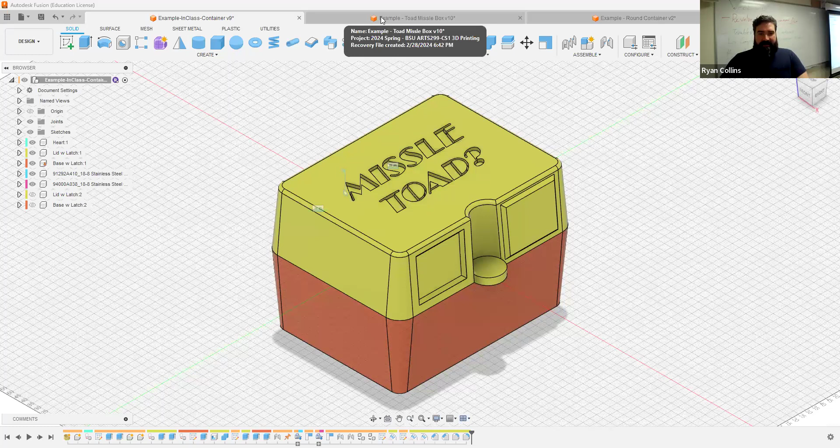So what I've done on one of the other models, the one that actually contains the missile toad, is added latches. Now these are just randomly assembled. There's no specific design feature to these, but this container now opens as well.

The latches also rotate open and close. What I've done with this is I added little tabs in the front and more hardware, but these are attached exactly the same way that the lid is attached to the base.

And these components are not nested within anything. Like these two lid components, you'll see the two latches here. They're all at the same hierarchy, at the same level as all the other components on this project. You can nest them within, say, the lid, but it's unnecessary.

So how I've done this is the same way I modeled the tab lobes for the main hinge here. I'll open up the other sketches—I just added more.

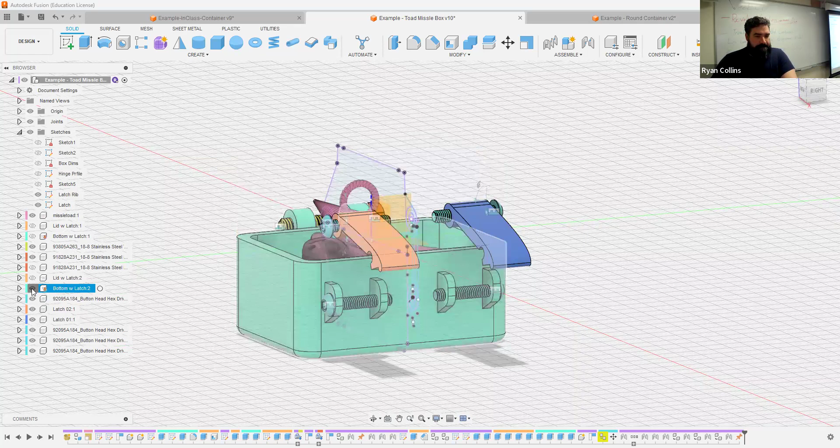Let me hide the lid and base. Oops, that was those two latches. And missile toad—same thing. I used the project tool to borrow the profile of the sketch of the container.

I just made these two simple sketches that are based around two circles rather than just one on the center here, and just drew lines between them essentially. It's kind of an oversimplification, but at the same time, it is fairly simple.

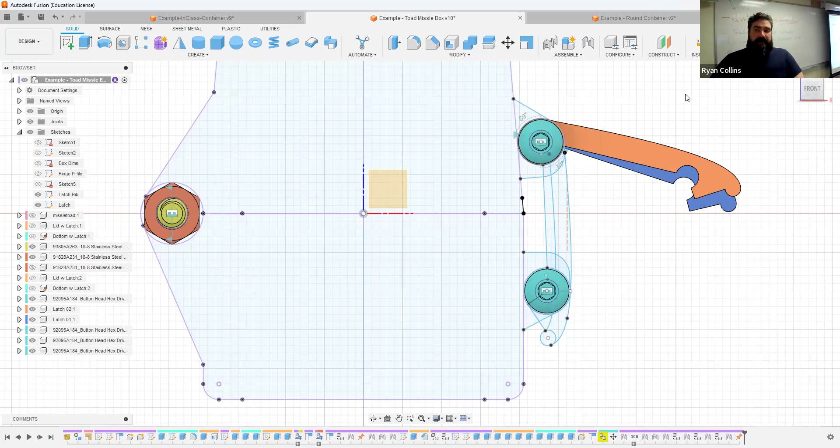You can choose however many you would like to make—this design has two latches, kind of overkill for something so small. This could also easily take the place of your little thumb catch here and such. So it's your choice, just an additional option.

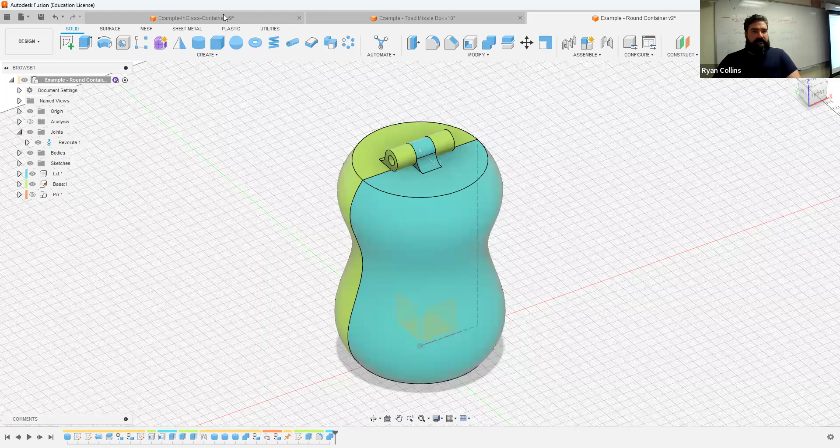So let me go over to our current example project. I meant to close that. The now questionable missile toad, as it does not in fact have a missile toad inside.

I would recommend, if you're going to decide to add a single latch, omit the tab here—it'll take its place. Or obviously the little plate features here, don't add those because that's where it's going to go. So let me make some duplicates.

The trick is, if I copy and paste these full components as such, it will copy everything about them and link the two. So what you should do, rather than copy and paste the components itself, is add new components and copy and paste the object itself. I'll show you what I mean.

I've already created these two additional components here, and I did exactly that. I have the lid, and you'll see the problem is it's an exact copy.

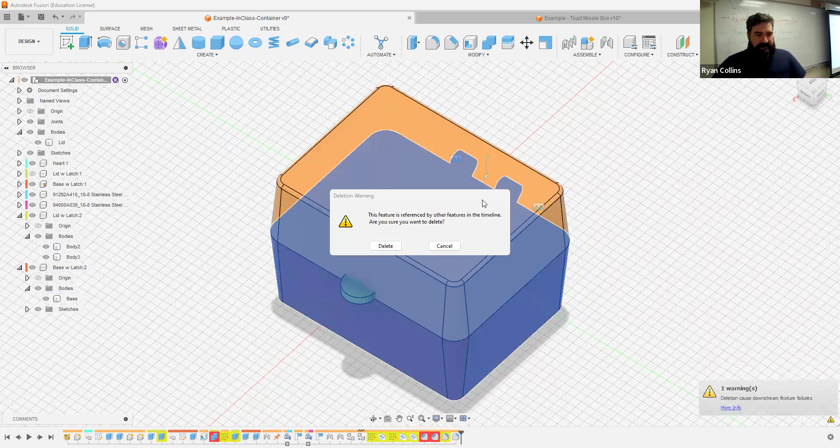So I'm going to delete these. Yes, deleteify. As well as the other here. Yes, deleteify. All right.

Oh no, it deleted everything. Well, that's certainly a problem. So let's Control Z that.

Great, that's all back now. Cool, so do not delete—that's certainly a problem there.

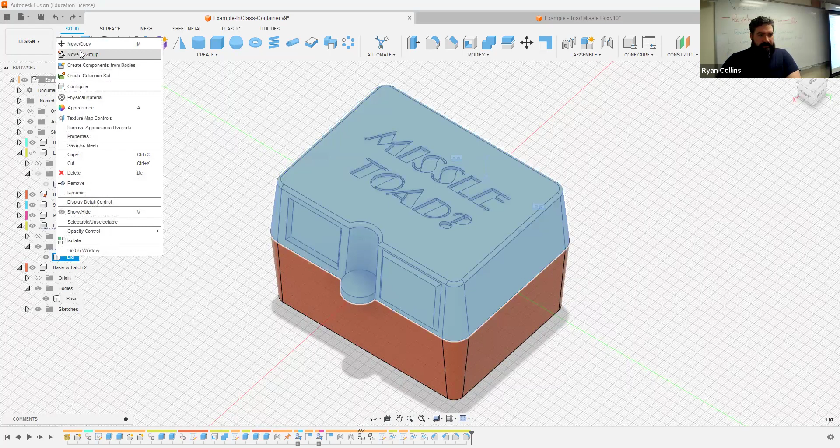But what you can do is right click, and you should be able to separate the two objects. Let's see if we can do this here. So, override texture map—dip, dip, dip, dip, dip. It is not letting me do that, so that's problematic.

All right, fine, we'll just hide those and I'll just create new lids and such. Yeah, that's problematic, most certainly. So I'm just going to create completely new pieces here. Not really a big deal, we knocked it out pretty quickly.

Make sure you activate the appropriate component when you go to extrude, making just a simple extrusion. I'm omitting the circle, I don't need the tab in this case. And I'm going to draw this up, I don't know, apparently 40—that seems more reasonable.

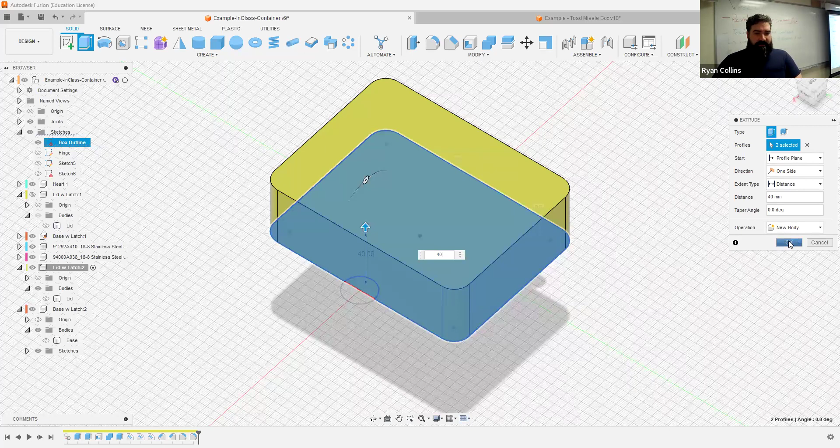This time, just to simplify, I'm not going to put a taper on it—plus it'll make it more distinct. Switch to the base component, repeat extrude, the bottom, go down enough to where it covers. So that looks like -50, we'll say.

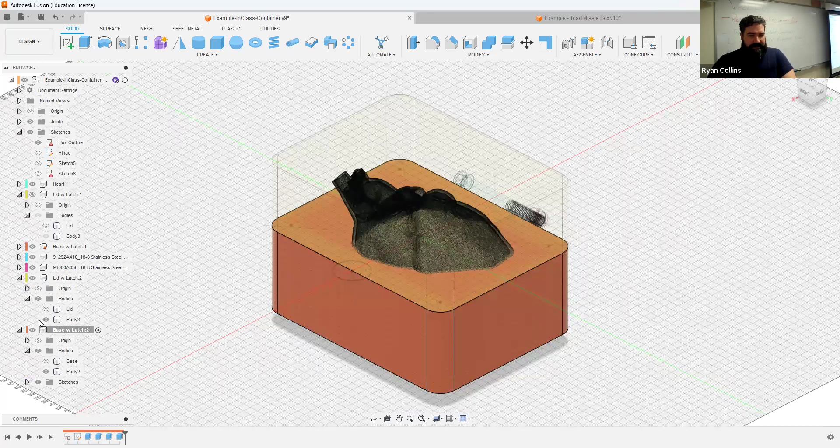Great, okay. And obviously, if you're going to do anything unique to these, go ahead and do that—meaning, let me activate the whole thing. I will go back and hide and collapse the previous components that we were working with. Don't need those getting in the way.

What I mean by that is, all right, I can still share that, that's okay, I don't know. Let's add a chamfer to the top just for grins. 10 is rather—10, there we go. Sure, odd box.

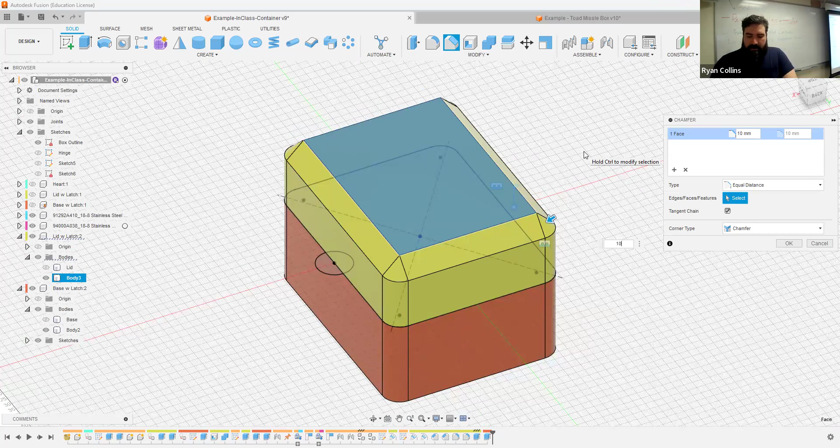Repeat chamfer, bottom, 10. Just adding features to this, no big deal, okay.

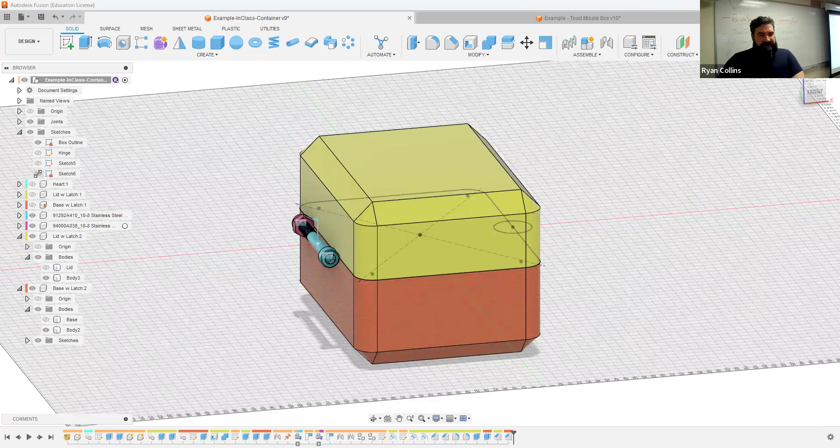So I'll have to redraw the hinge lobe and such. That's not a problem. But what I do want to do is create a new version, basically like I did for the hinge here, but for the front that will become the basis for both the lobes that the latch is attached to, and of course the latches themselves.

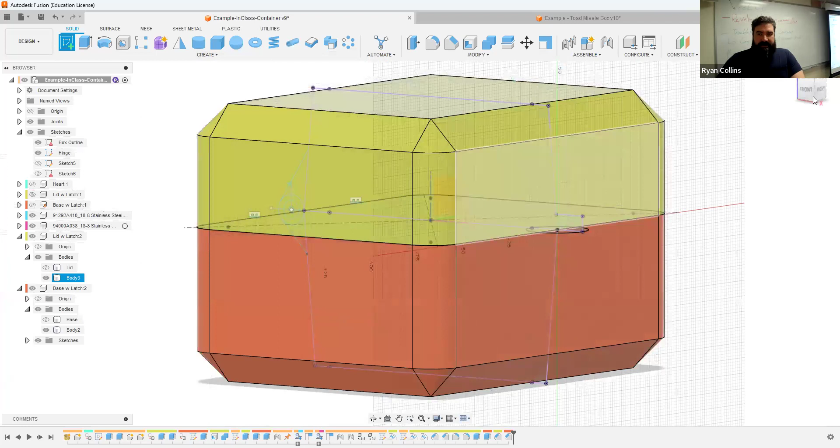So to do that, new sketch, as always. Switch to front view, which is actually the side relative to the object. I'm trying to get to the origin plane, so if we can't quite get to it, just hide the object. Of course, it's also interfering with the sketches I had before. There we go. Now again, I am not activating any of the components.

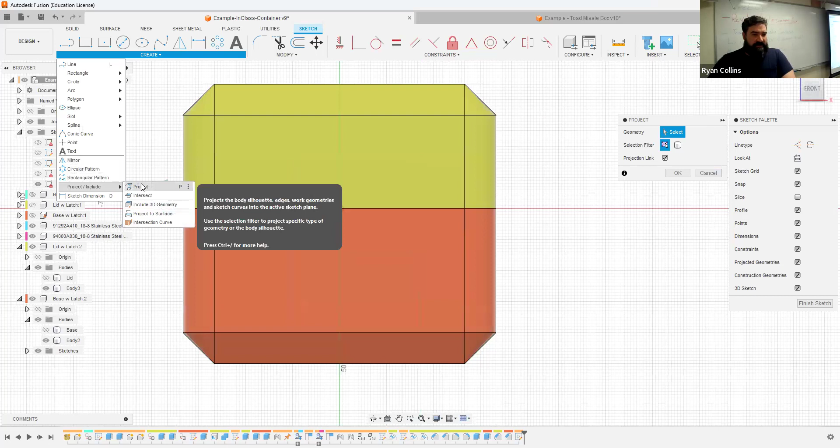I want this sketch outside of the components so that I can create the extrusions within those component bodies. I'm going to use a project tool, so just hit P or drop down to project, include project. I'm going to select my bodies, I want all of that. Now again, I can hide those and I'm just left with the sketch profiles.

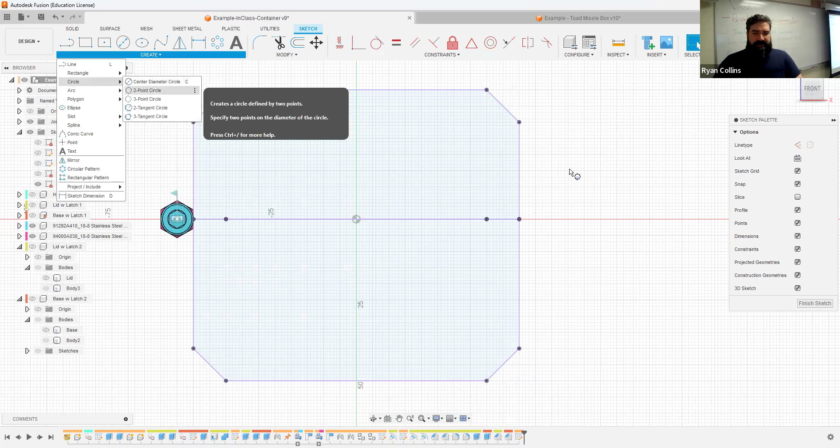Before I drew a sketch and just made a circle based directly on the outline here. I don't want that this time. What I want is circles above and below the split line, the lid and base. I'm going to start with a 2-point circle simply because I want it to start at the line itself. I just moused over the center point because the triangle constraint came on, that's not necessary. I plan on using like M3 or 3mm hardware, so I'll make this large enough.

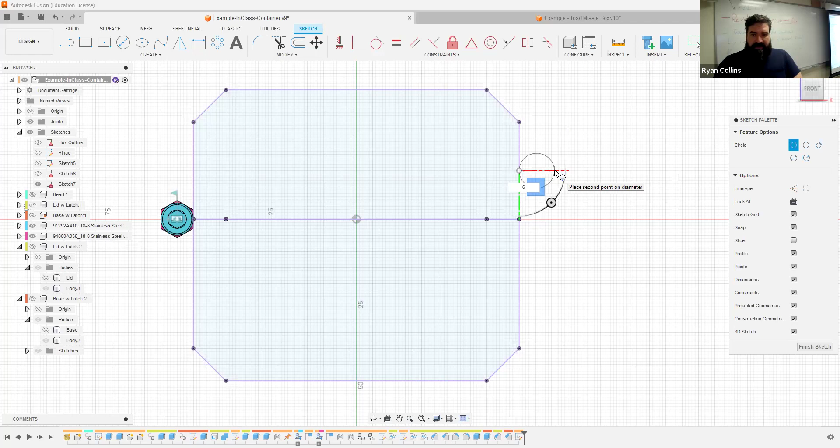Let's say 6. 6 seems kind of small, let's make that a little bit larger, if nothing else just so you can see it more clearly. 10mm for that circle, great. The reason I'm doing it that way is it starts connected already to that profile, and I have a center point. That's going to be 3mm there because that's what the screw is going to go through.

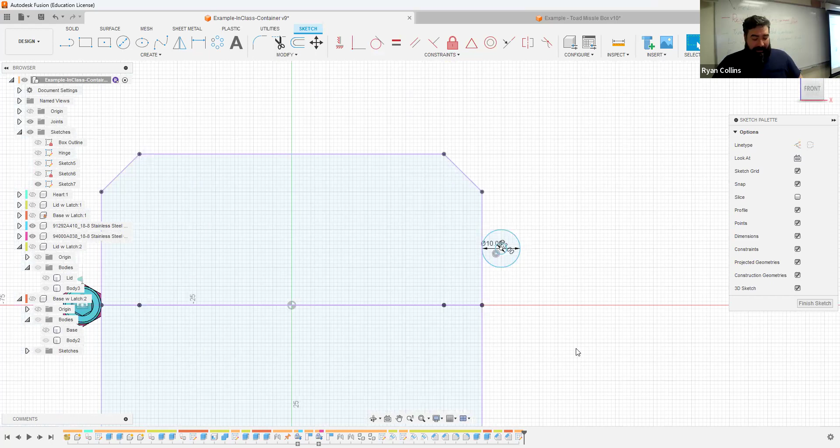Now, I'm making this with screws, as you can see here. You could easily draw this in with some kind of bar or something like that. And tell you what, that's exactly what I'll do for the bottom, just to model it that way so you can see how that can work.

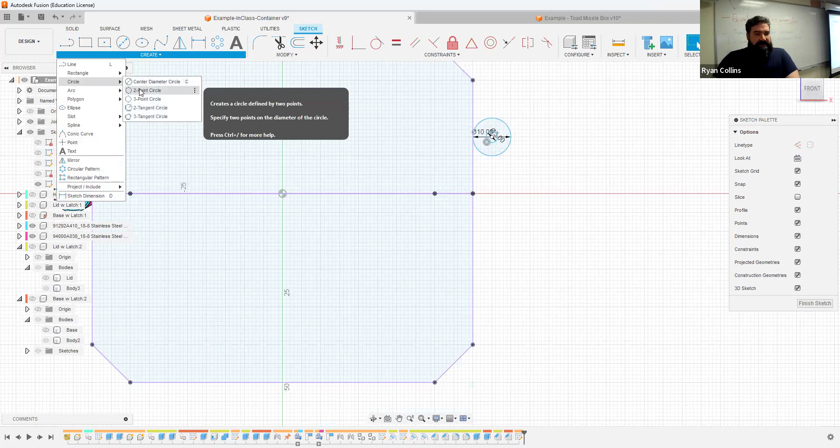I'll still start it the same way, create 2-point circle, and sure, why not, I'll let the center point be the case there. 10, the 0 thing is stuck on my computer here. Repeat circle, and that's going to be 3mm. Or I can make this slightly larger, it doesn't matter. Tell you what, we'll make it a little bit larger just because I'm going to turn that into a bar.

So I also need this to have some sort of lobe design, same thing as the original hinge. For this, it can be just kind of whatever you want. If you want it to be a rectangle out of that, great, you could make it just kind of a fit point spline. That's fine too. I'm going to start right in the center, or over here, just kind of doodle up. That's a little bit too large, nope.

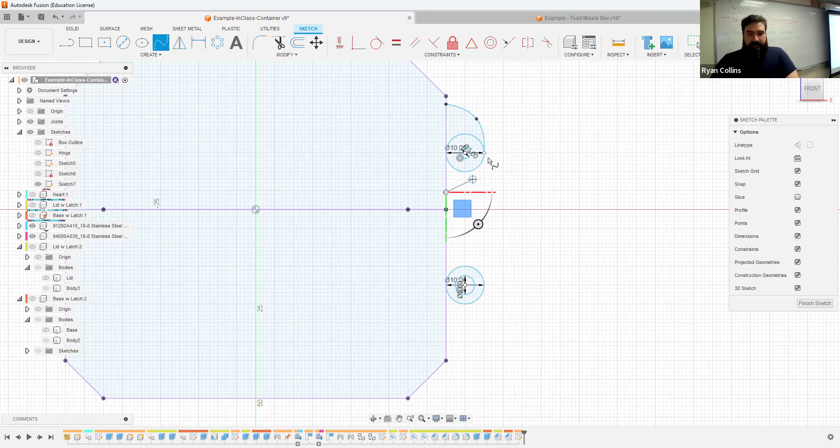And just kind of shrink to fit, I guess, sure. I'll make it again somewhere down here. Honestly, I could make this a lot easier on myself by using some other tool. There we go, great. Remember, you can adjust those, doesn't matter, I just kind of made it this odd shaped lobe.

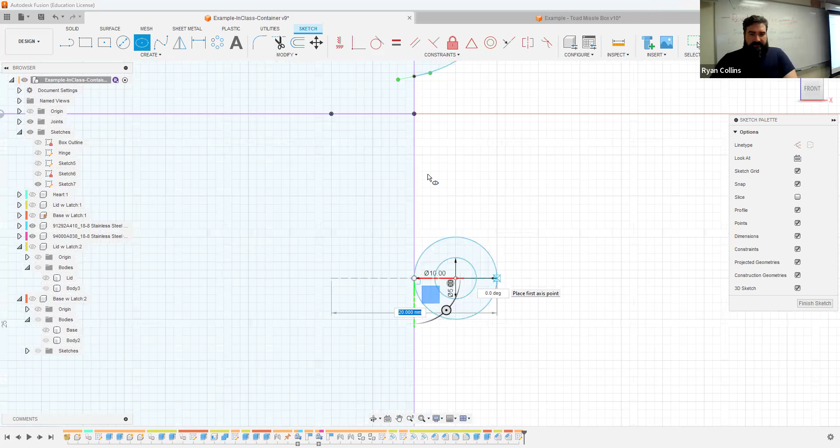Down to the bottom, I'm going to make it easier on myself. I'll use an ellipse because I just like making things round. There you go, started at the edge though. First thing I select is the outside edge of that outer circle, and then drawing upward. It's an unnecessarily elongated shape, but just kind of playing with this. All right, great, there we go. These are going to become my lobes. So I'll finish that sketch.

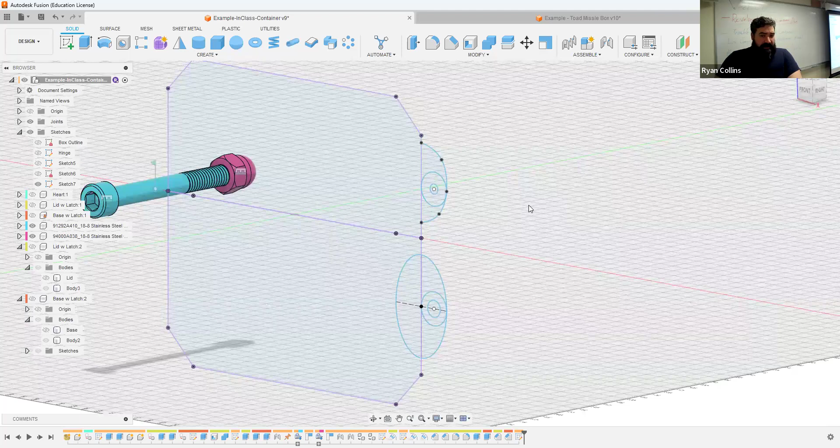So the next thing I want to do is now create what will become my latch. Now, I could have done it on the same sketch, but it just gets so complicated. So let's label that lobe or latch lobe. And I'll now create another sketch, same deal, and that I'll label as latch.

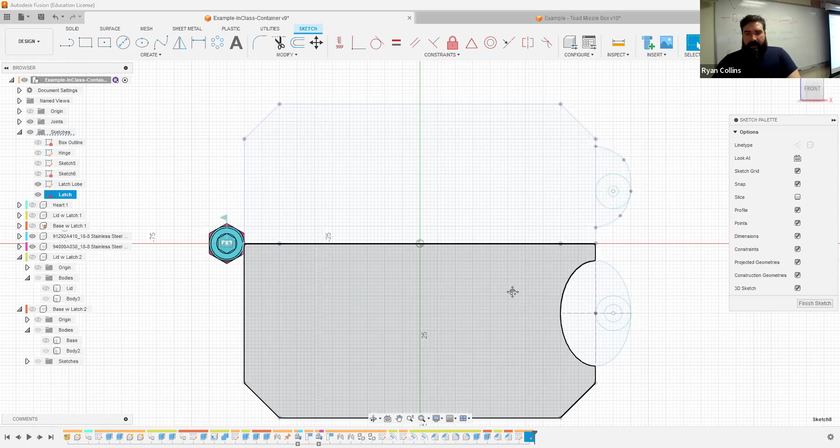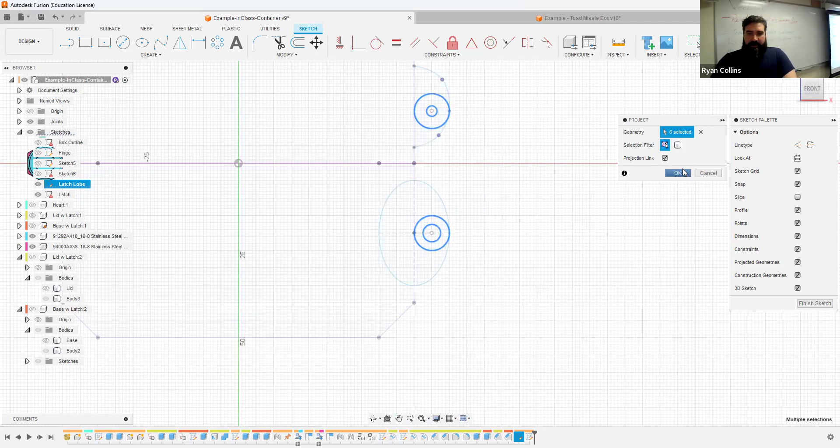In this case, I'm going to do the same, but I'm going to continue to borrow stuff, so I'm going to project again. Make sure you have sketch selection so you can actually select the sketches. I'm just using some of these as my reference points, that's all. I could of course copy the container as well, but it's kind of unnecessary. I don't need to select the lobes, really I just need to duplicate those circles. Hit OK.

So this is the part where you need to make sure that you're creating enough space. And what I mean by that is the latch can be whatever shape you want, that could be a straight line. I'll use another fit point spline if I want to make it kind of curvy. But one of the things you need is this circle has to partially wrap around this center circle. What I mean by that is the top one is going to be a complete hinge, a complete circle around what will be that metal screw.

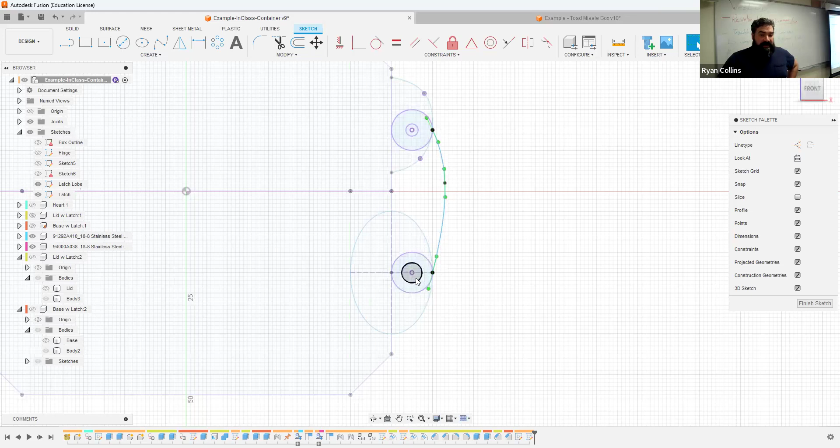This needs to be partial. And how do you calculate how far to go? Just a little ways around.

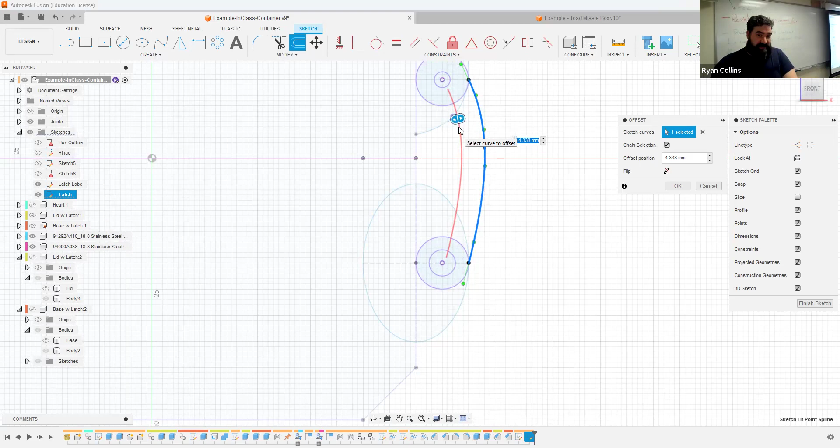So first what I'm going to do is use an offset line to make a second line here. Honestly, I'm only making it thick enough that it seems like it'll be strong enough. So -4 seems reasonable. That's just making a duplicate of that line. I'll trim off the excess later.

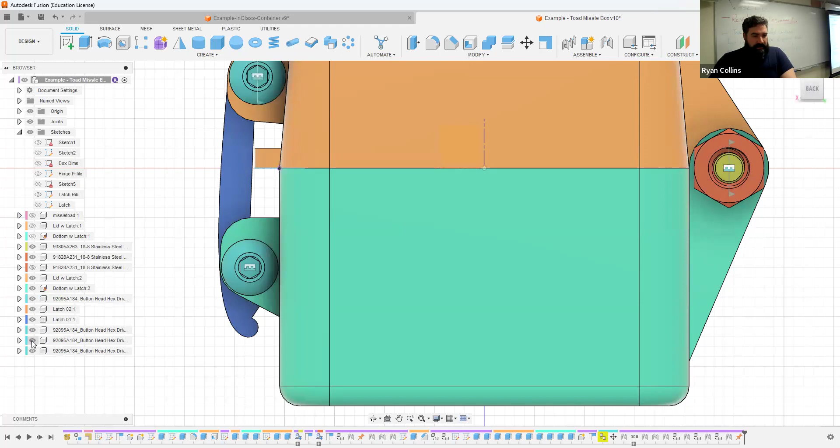But what this is also doing is starting to make a partition on the circle. Let me switch back over here, and you can see what I've done. I'll hide the appropriate hardware and the bottom latch. As you can see, this latch partially covers this circle, and what I did is divide this circle into 3 parts.

So 360 divided by 3 - sorry, I forgot the math on that for a second. Not plus, divided by 3. Yeah, 120. So 120 increments - I was right, I just second guessed myself. That's not an exacting number.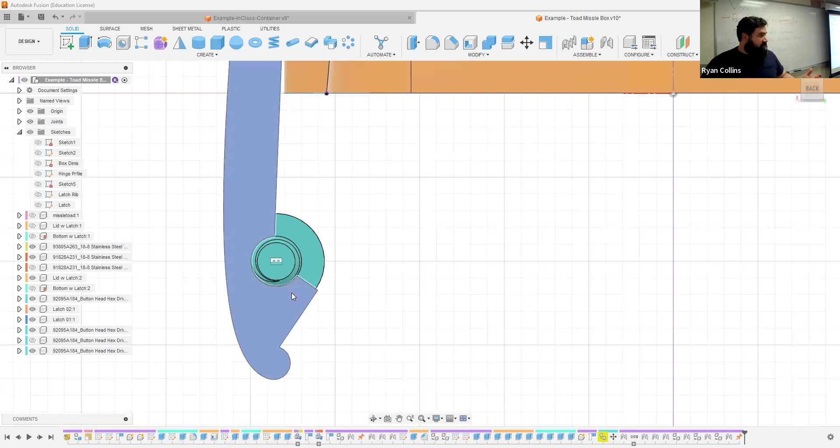That's just a good amount so it has enough of a little lip. When you push that latch over, that allows the printed plastic to stretch and deflect enough to snap over, but not so much that it won't move at all. Honestly, this could also be a trial and error thing - you print a latch, it works, great, or it doesn't and you go back and edit this, maybe add a little chamfer or fillet on the inside to give yourself more clearance. But the good thing is this part here that is now an angle acts as a ramp to help snap over that curved element.

So from here, all that means is I'm going to draw a line from the center point, and tab over and say 120 degrees. Problem is it's measuring from there. 120, and you can draw it outwards if you need.

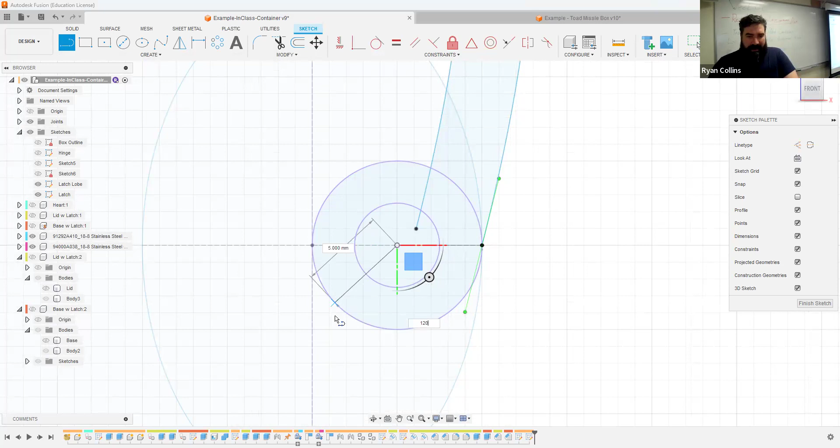That's fine, it's just going to be a line that you can then trim off. And I'll do that - just trim off the little extra chunks. No, not that one - trying to trim that one. There we go. And you can leave that, that's okay, it's not interfering with anything. Just going around and trimming off some pieces.

And you can see now that as I mouse over this tab or this part of the sketch, it's partitioned off, and I have just enough over that lip that it should catch and snap in place, but not snap off.

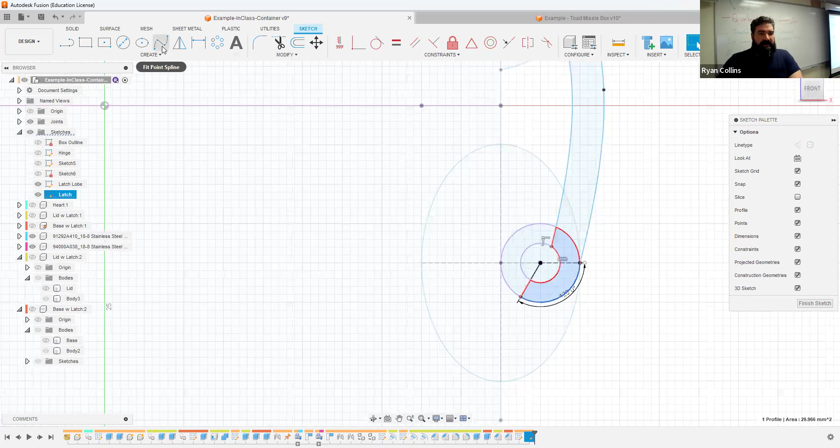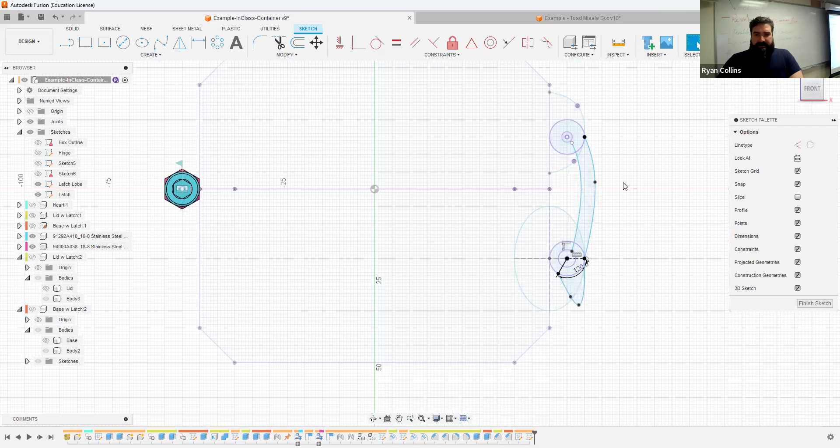And obviously don't forget to add a little tab or something you can actually grab onto. All that would be is drawing a little lobe here, that's all. Could obviously make that much more elegant, but whatever - you'll start doing funky things if you play with it too much. Okay, there you go, that'll work. Pretty simple, pretty straightforward. Maybe I can add a little bit of that or do it later.

Okay, looks like a jumble - it'll get cleared up in a second. All right, so I'm going to go back to home view. Let me save there - latch, sketch.

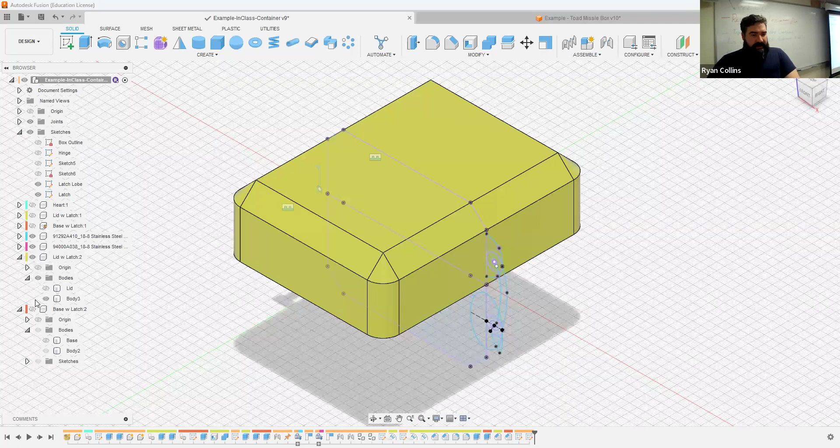All right, so now we need to start unhiding components and things like that. I'm going to make the latch first, and that'll be my reference point. The latch is going to be on its own component entirely, so might as well go ahead and create that now - new component, label it as latch. There we go. I activate it, that's okay.

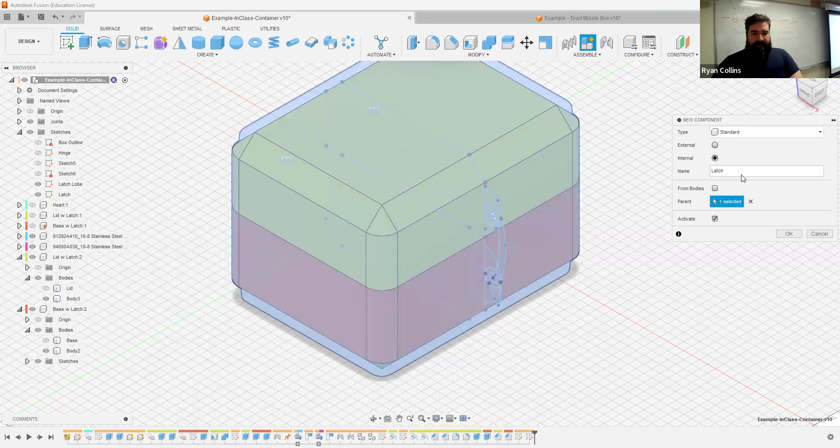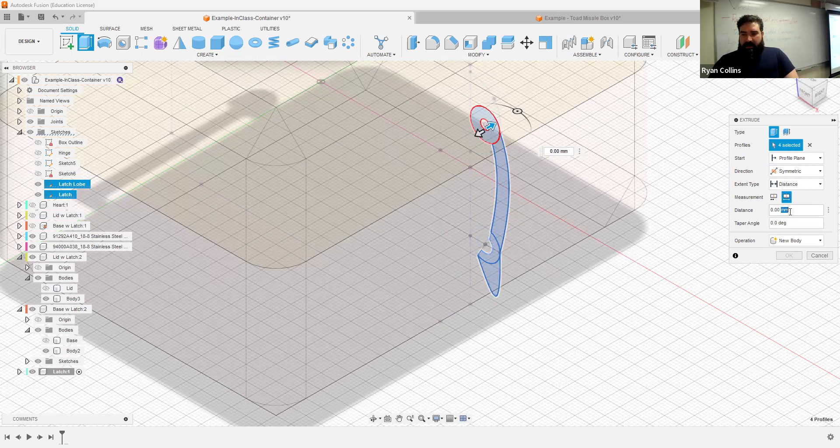Hit extrude, and I'm going to start selecting. I have what's definitely going to be the main body, the little funky tab, partial circle, and complete circle. Now, start profile plane, fine. I want to make it go two sides symmetrically, and let's do that as an overall distance - let's make it a 10 millimeter tab. There you go, now you can see how that instantly gets developed.

Great, okay, looks like I got a little bit of an odd inclusion there - probably should have trimmed that out. That's going to be a hole. So if you notice something like that come up, definitely go back in, edit that feature, and make sure you select that little chunk of the profile. There we go, not a big deal.

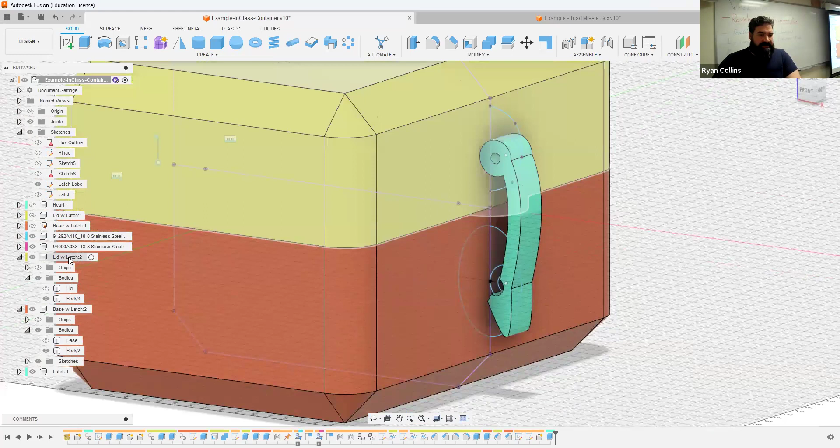All right, now unhide that sketch again because it's going to do that, but this time I want the lobes. You can see the whole thing. Remember, first we select the appropriate component - so let's say lid. Now we extrude - got to select the two parts, the lobe and the circle. If you're having trouble selecting with that latch object in the way, just hide it temporarily.

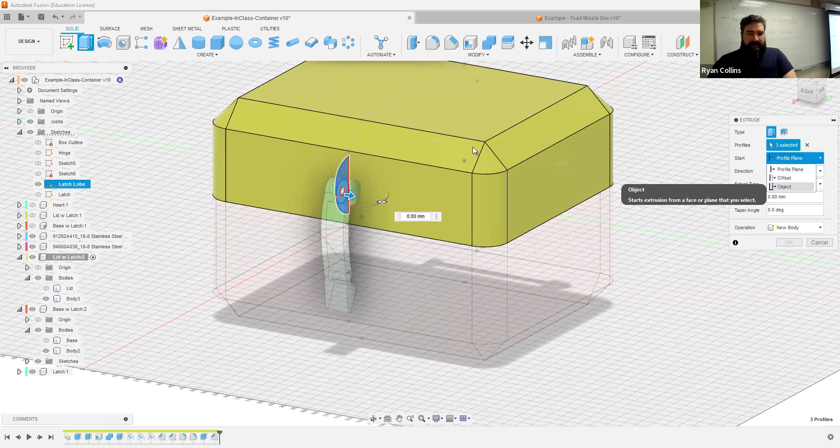Now this time I'm going to have to make multiple extrusions, two for each side. So start is not at the profile plane, but at an object - I'm using the latch itself as my starting point. All right, now I don't know, 2 millimeters seems reasonable. Oh, not an offset, wrong spot - I meant distance.

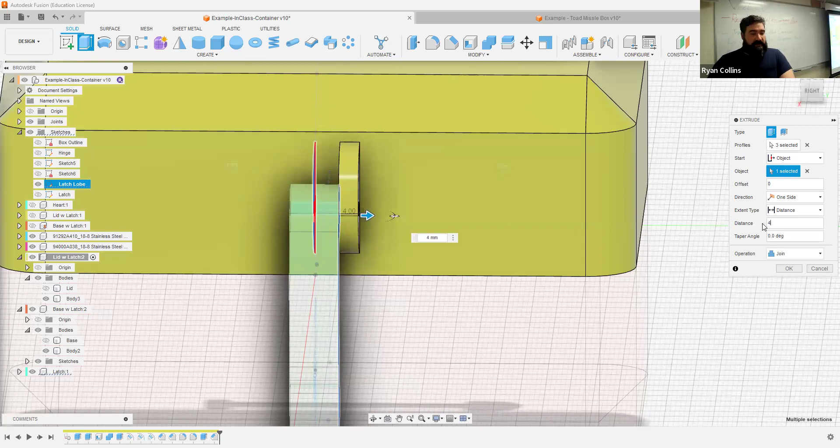So I'm just making that little tab there. Go back, set that to 0. Accidentally hit there—that looks a little flimsy. Let's beef that up to like 4 millimeters. Like I said, thin gets pretty thin quickly. There we go, repeat, do the other side.

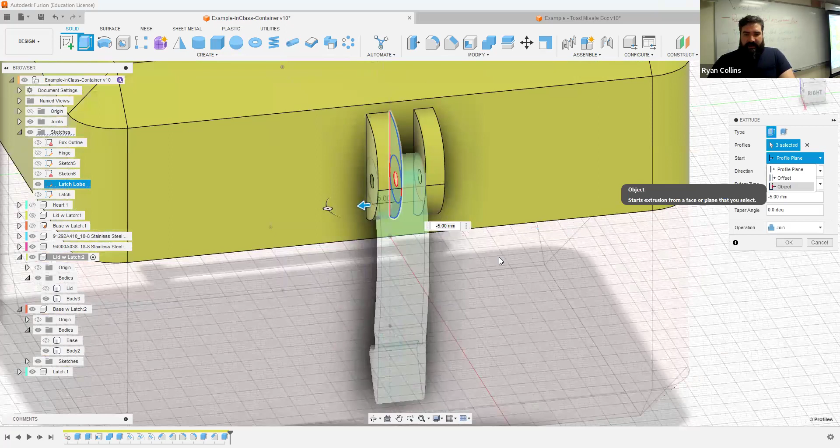Same sketch. All three, there we go. It's already trying to extrude from there. I want to start at object, select the other side of the latch profile, and it throws it out that way. Problem is, I don't know why it's doing 5—that should be 4. Great. Again, join, and it's automatically joining and becoming part of that component, the lid.

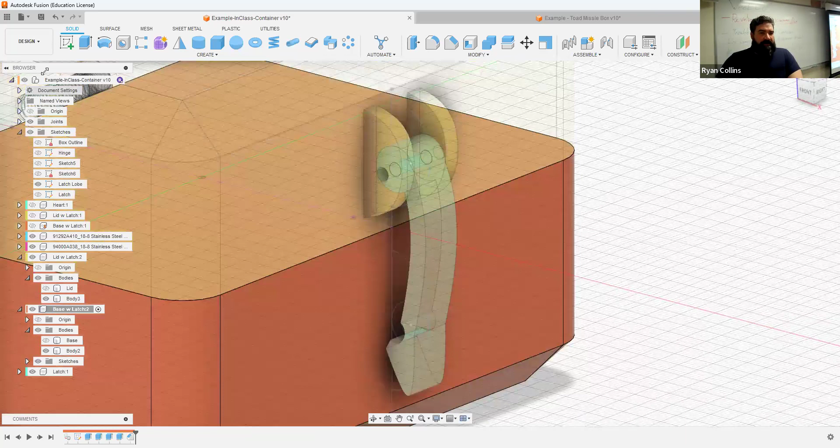Switch components, base. Repeat a lot of this. Selecting the bottom lobe. I want that. Now, in this case, instead of using a screw for the bottom, I'm going to make this printable.

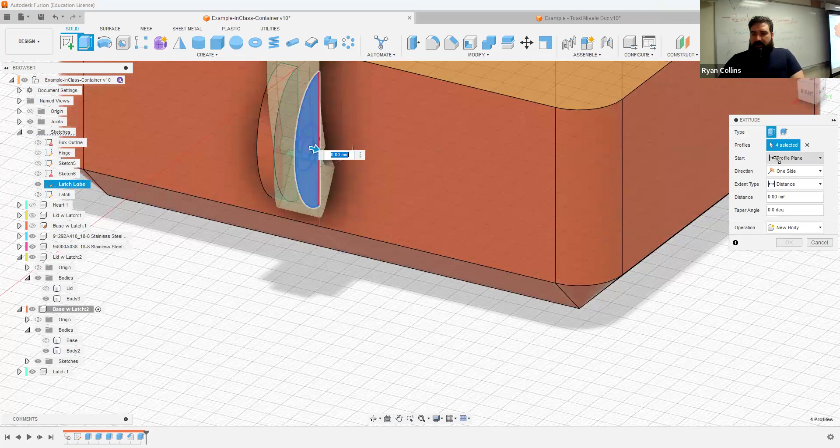So I'm going to select all of the parts, starting at an object, that face—negative 4 because we're just using 4. Great, join, it automatically becomes part of the lower component. Orbit around, repeat. The lobes, circle, and inner circle. Start, object, face of the object, distance, 4 millimeters, joins.

Perfect. One final step on this would be, for modeling it, is I need something between there for that to all latch onto. So let me hide the latch itself so I can see a little more clearly.

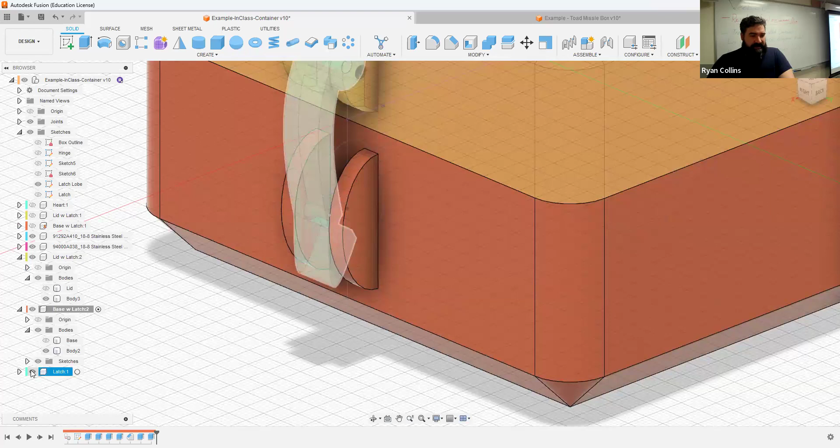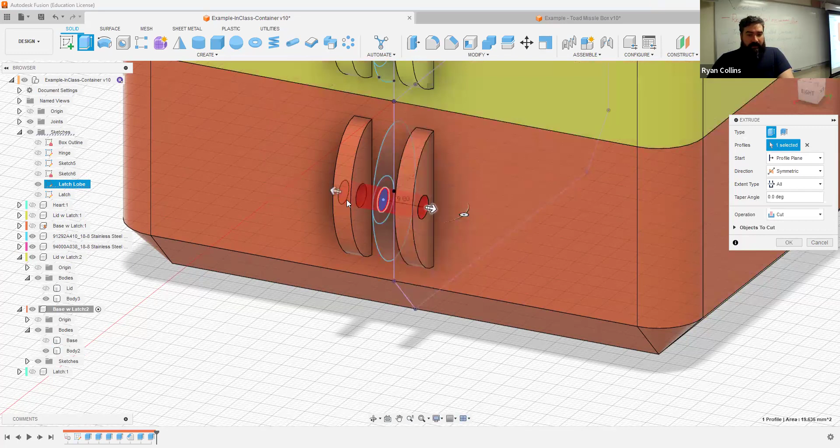And one final extrude. Now I want just that chunk there, just that inner circle. I want to extrude symmetrically in both directions, starting at the profile plane this time, but the extent is rather than distance—I can select all, and it's just automatically going to go all the way. Obviously, don't cut, I want to join. I want that little bar to be there.

Hit OK. Nice. All right, activate everything. Unhide all the things, and except for the sketch—I want to hide that. All right, there you go. Very simple, albeit kind of awkward latch.

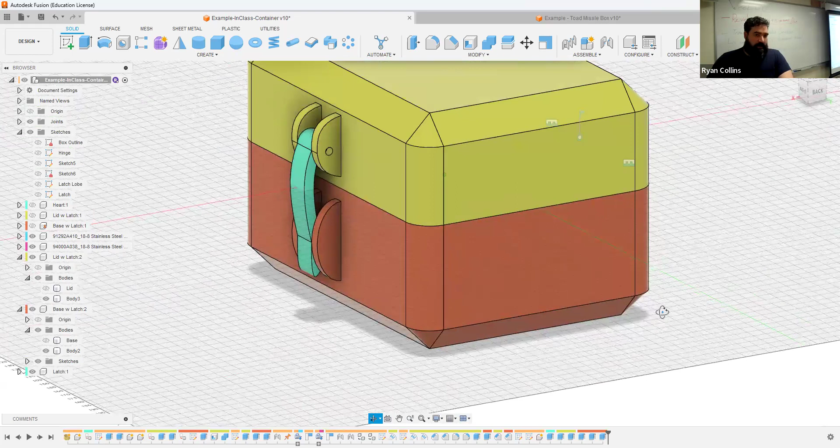Last thing on this would be bring in the hardware and also add a joint. So this is a 3mm hole. Let's double check the distance.

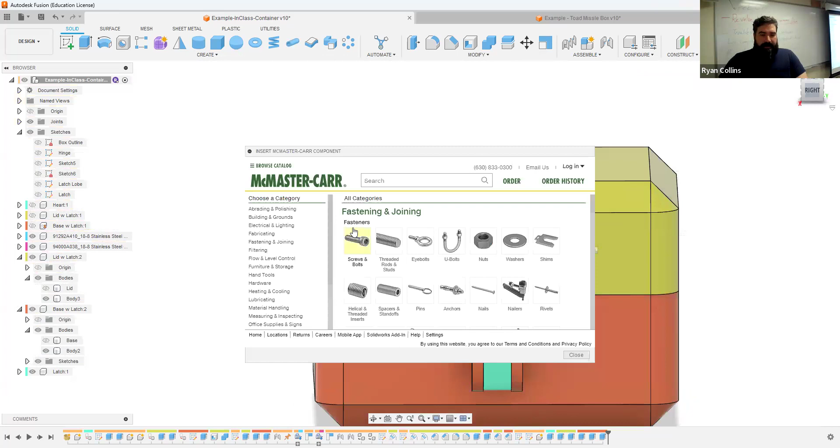Go down to the one that doesn't matter. In this case, there's fine threads, coarse threads—we're not really worrying about that at the moment. Pick one that works for you. Remember that you do have to select the appropriate option to import. Just remember, go to a step file. Just try to remember the next step is a step file. Easy way to remember, for me at least.

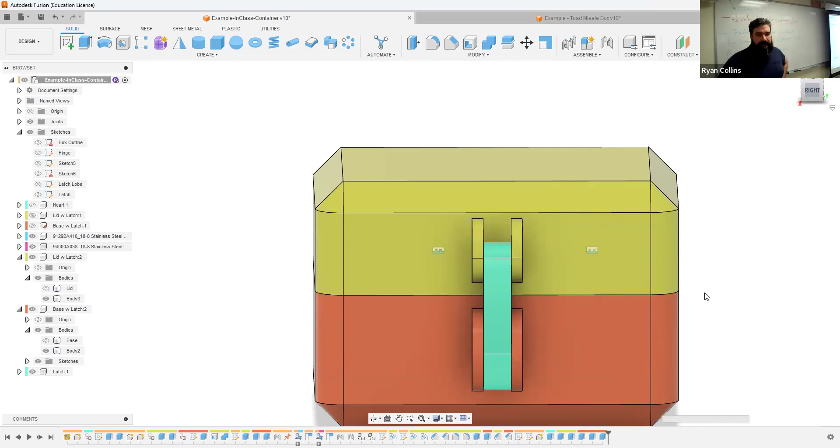And we hit download. It'll bring your model into the project after it thinks about it for a moment. There we go, so move it out. I accidentally selected two things—I wanted to select that object that just flew in. There we go. Instead of grabbing the arrow, I accidentally selected the lid.

There we go, and rotate it 90 degrees. And I'll use a joint tool to snap that in place. You can use the checkbox here, capture position—it'll lock it now in that place.

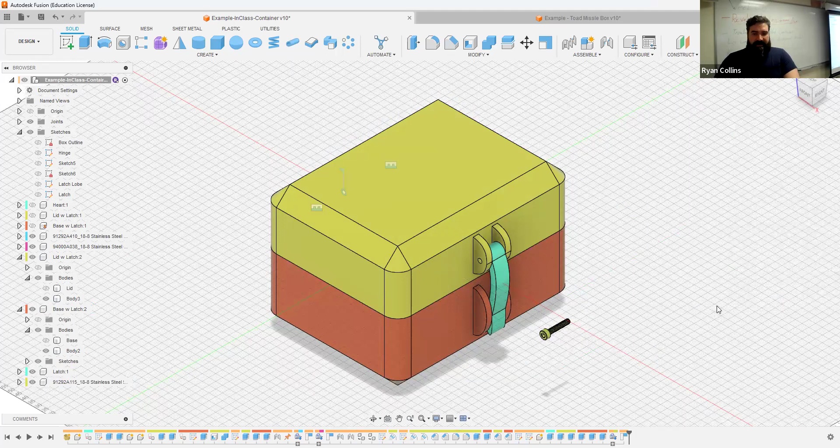Neato, all right. Now we'll use a joint to drop that in. Now, to do this, I want to select at the underside of that component, but inside the thread. So what I do is I mouse over that face that's the bottom, press and hold Control, and it locks your selection to that face.

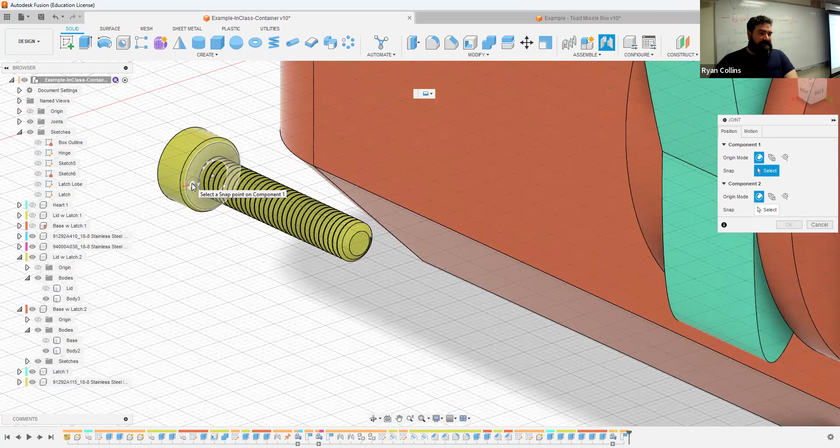And I can grab that little X right in the middle. It ghosts out—where do you want to put that? Remember that the thing you select first is what will move. The thing you select second is where it will move to.

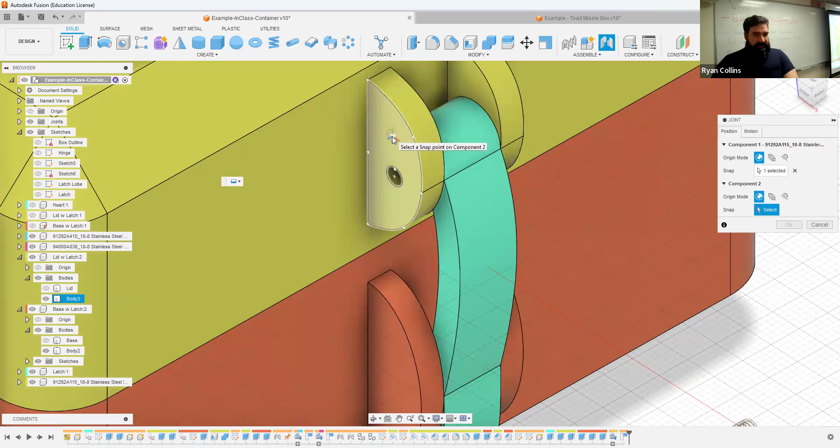I mouse over this lobe, and I want it smack in the middle. If you have trouble selecting that, mouse over the face of the lobe, press and hold Control again. Select the plus sign in the middle. It'll fly over, lock it in place.

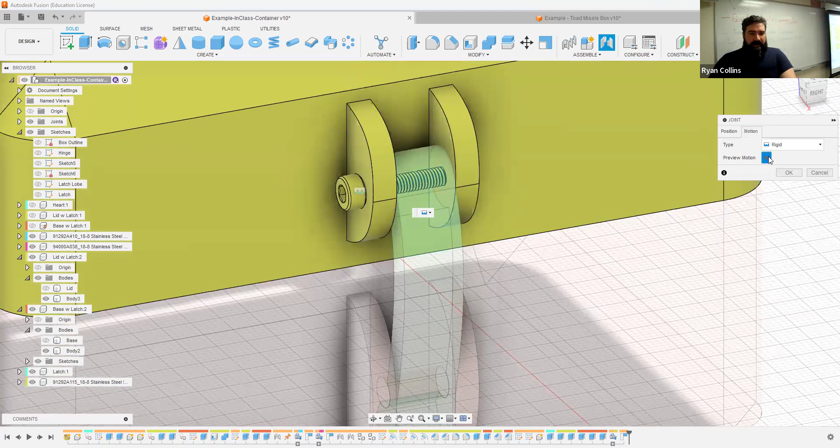Clearly, I measured poorly and should have used a much longer bolt. Deal with it later. Okay, snap it in place. It can stay as a rigid joint. Remember, if you animate it, it just jiggles like it's been glued in place and gives you anxiety. There you go, locked in place. Let's save there. Save.

Hardware installed. Now we need to put the joints in, the moving ones. Select joint—again, this has to be the latch, lid, body, all that. They have to be their own components, not just a body inside of the main project. Has to be their own individual components.

The thing you select first is what will move. The thing you select second is where it will move to. I want to select the inside of that cylinder, or you can just snap it to one of these faces. If you have trouble getting to it, hide a component, hide an object. There we go. I'm going to hide that screw too.

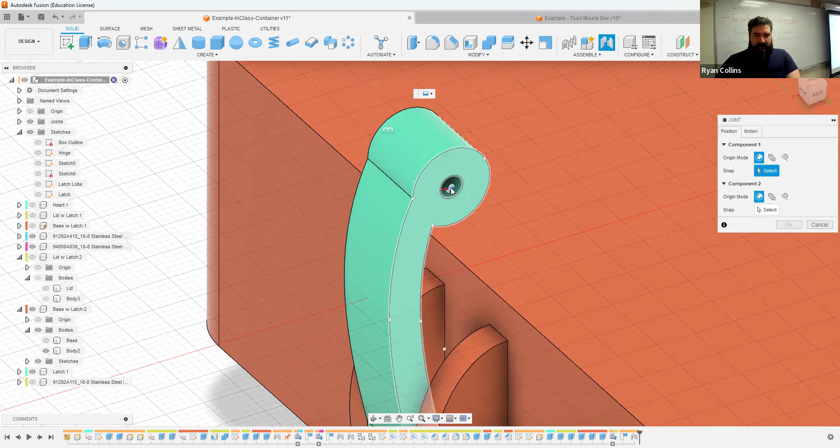And I need to select the inside of that cylinder or that face. Press and hold Control, locks the selection right there, that face. Great. Unhide the lid, same deal. I'm going to mouse over the inner lobe this time, press and hold Control, snap position. All right, I'm going to change the type of motion to revolute, and it's going to move.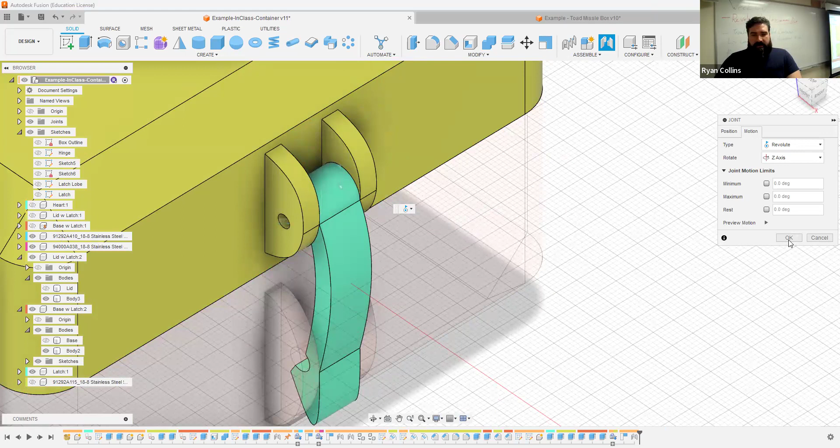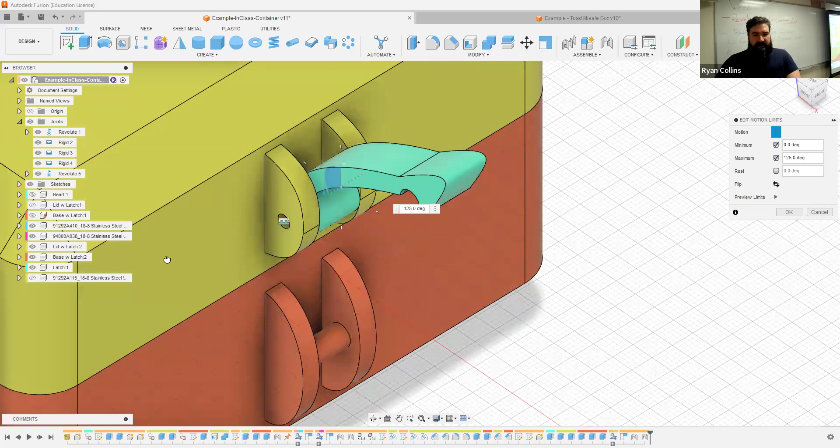Obviously it clips through right now, that's okay. Hit OK. Let me collapse some stuff so we can see what we're doing. Now just go to that joint, set revolute, mouse over the little arrow key. Check these boxes so it starts up, and grab and move. Doesn't matter how far you want to move it—let's say 125 degrees, whatever. Hit preview if you're not sure. Whoop, clickety clack, there you go.

So it moves, huzzah. Now, again, because I made a new project here, or I had to make new bodies here, I've got to do a few things like remake the lobes on here. That's a pretty quick thing, just repeating exactly what we just did.

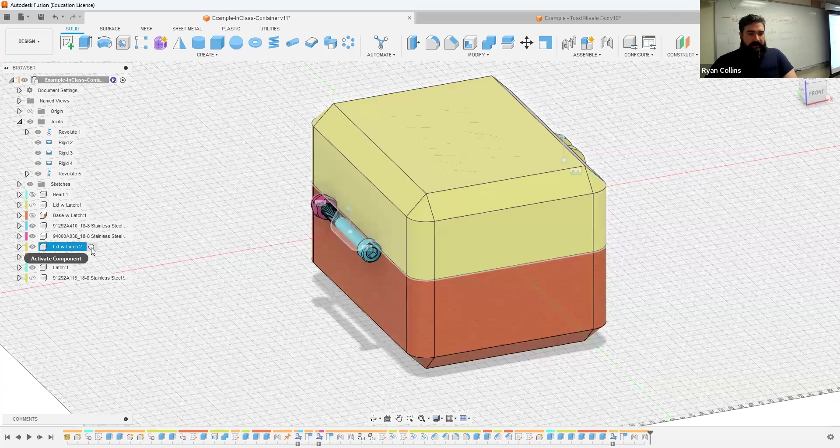Let's activate the lid. We drop the joints, and let's get the sketches back out. I want my hinge sketch unhidden, and this one we're just going to repeat, no problem. Extrude the back hinge, the lobe, the circle. There we go, same profile plane start. Yep, I want it symmetric.

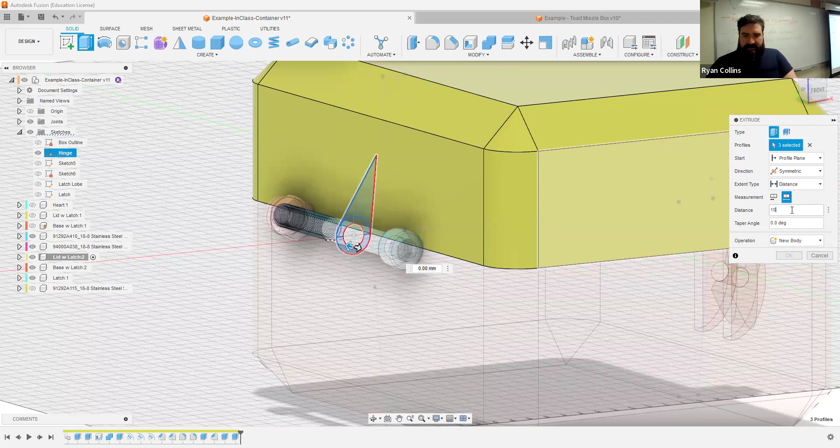Overall length, I don't know, 10... 20, okay sure fine. You might make this a little bit larger just because it's a little bit larger project. Okay, 30. I don't know why it's defaulting to cut, we don't need that, we want to join. There we go, great. Switch the base component, repeat.

Extrude. If you're having trouble selecting everything, hide the lid. And it did hide my hinge sketch. So circle, circle, and the bottom lobe. There we go, only this time I do need to unhide again—so a lot of toggling back and forth.

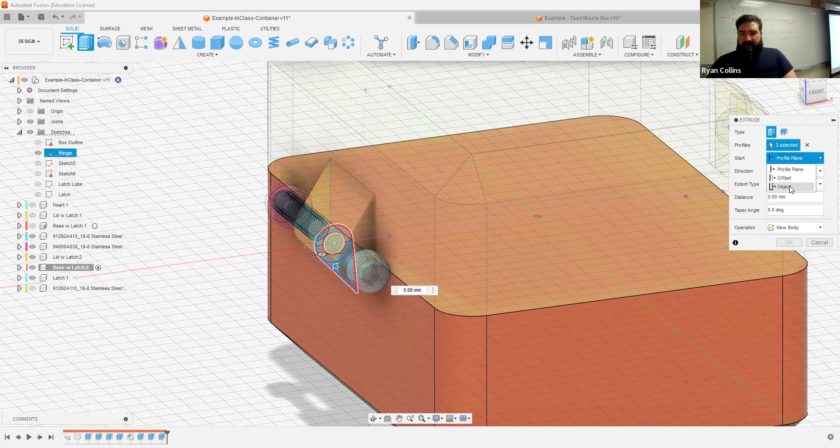I need it to start at the object and the start of that lobe. This time, I don't know, we'll make it 10. Oh, it's going the wrong way, so let's make that -10 to go the opposite direction. Cut—no, I want it to join. It becomes part of the bottom.

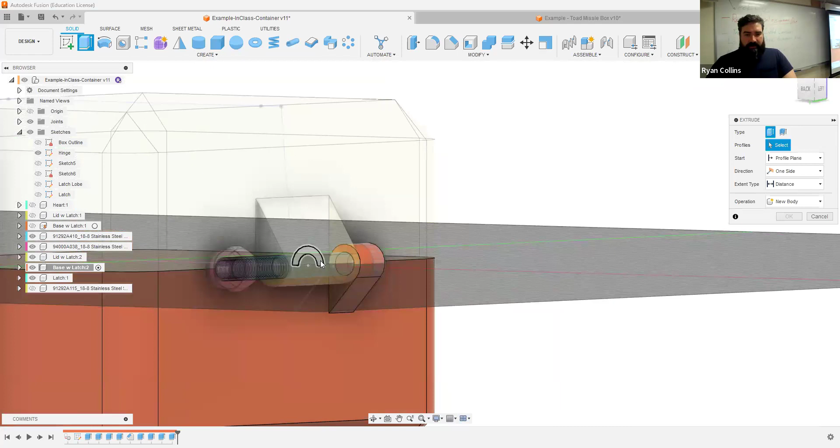Great, repeat again to make the other half. There we go. Circle, circle, lobe. Start, set object, select the face. Distance 10—again it's cutting, nope, I want it to join. There we go, great, just repeating that.

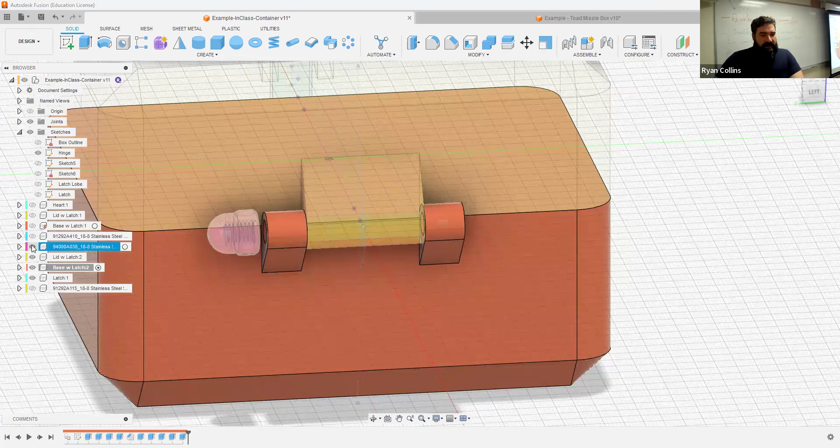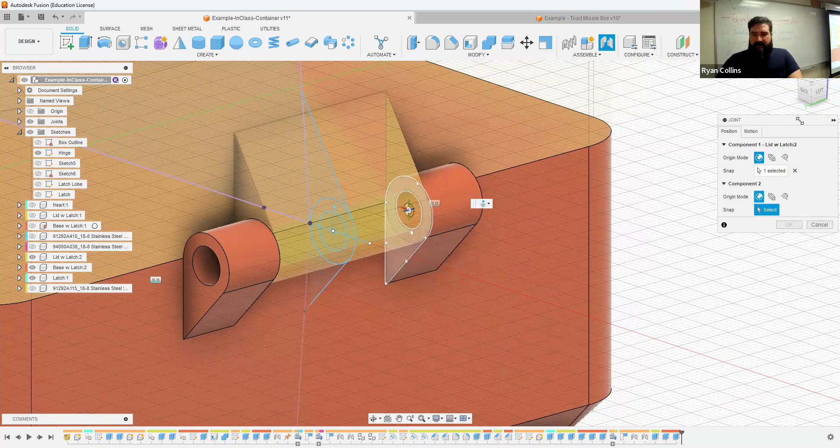All right, let me hide this hardware so I can get it making the joint again. Okay, let's activate all the things. Make a joint, same—inside, mousing over the lobe there, press and hold, locks in place. Again, mousing over the lobe, press and hold control, snaps in place. Motion, revolute, double check, great.

It's going the opposite direction. Oh, and I still haven't hollowed this out. That's all right.

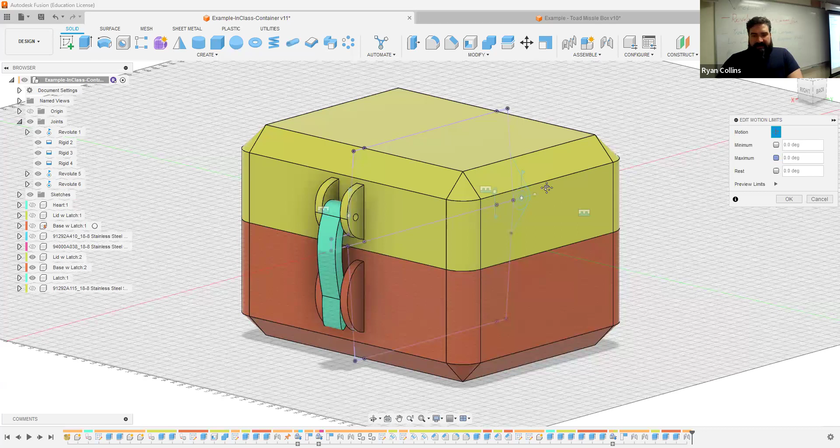Right click on that component all the way up, second one down is ground. Boop. All right, so now it opens and closes, and that latch flips up and down. So you've basically just created a slightly more complex object here. There you go—revert position, snaps back in place.

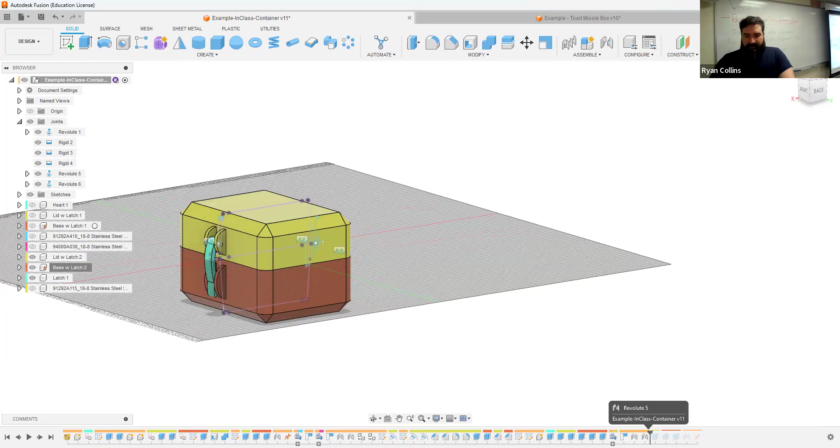Now, obviously, if I actually want this to be a container, I do kind of need that to be hollow. So since I forgot to do that before, let me just snap back in place before I did any of that stuff—before I made the hinges. There we go. And in this case, let's just use a shell tool.

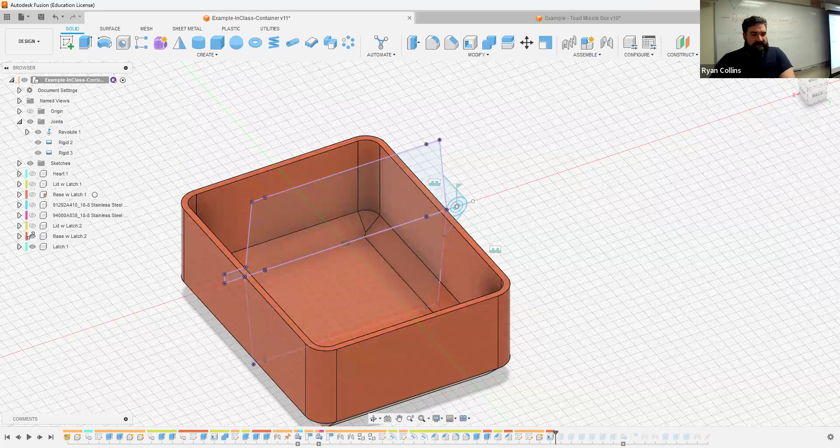Let's simplify this—shell there, 3 millimeters. Great, it's going to take that chamfer into account. Nice, hit OK. Switch to the lid, repeat: shell on lower face, 3 millimeters. Hit OK, great. So now I'm going to hide everything, and when I snap back to current, it'll recalculate everything.

But because I made that shell before I made these lobes, it doesn't interfere. Snazzy container, okay—so that's just adding features.

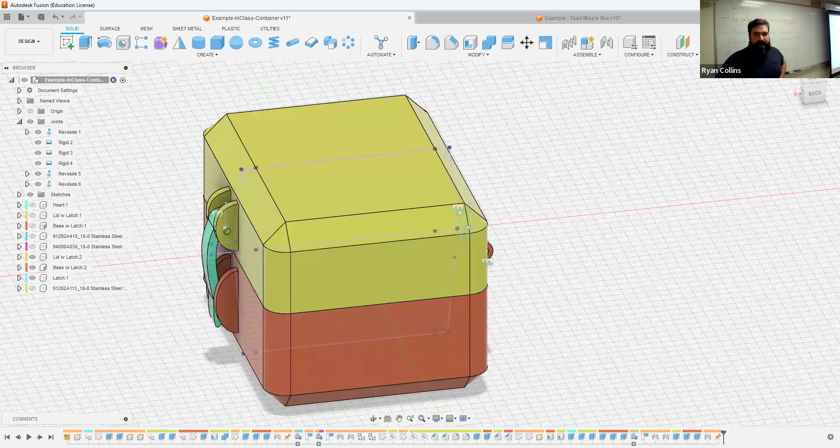So if you wanted to make this latchable, there you go. You could add as many latches as you want, make 20 latches on it—doesn't matter, it's not opening for anything. I mean, it's 3D printed, you could open it with a rock. So whatever.

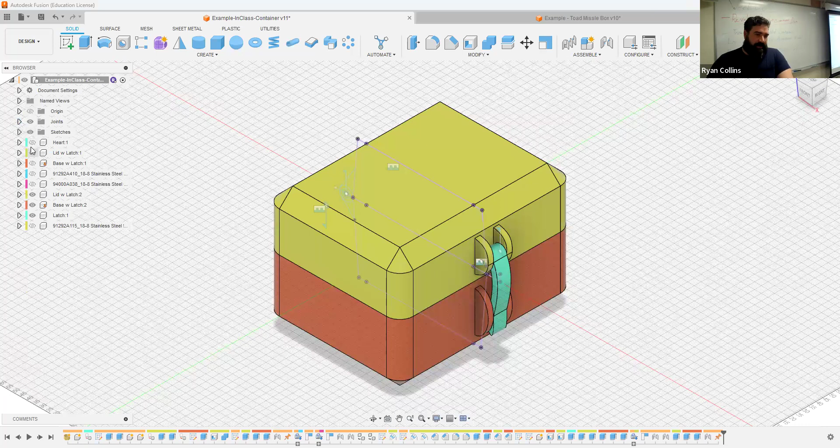But just a way to, albeit somewhat convoluted with more steps to it, make a lidded latchable container. All right, good luck with it.